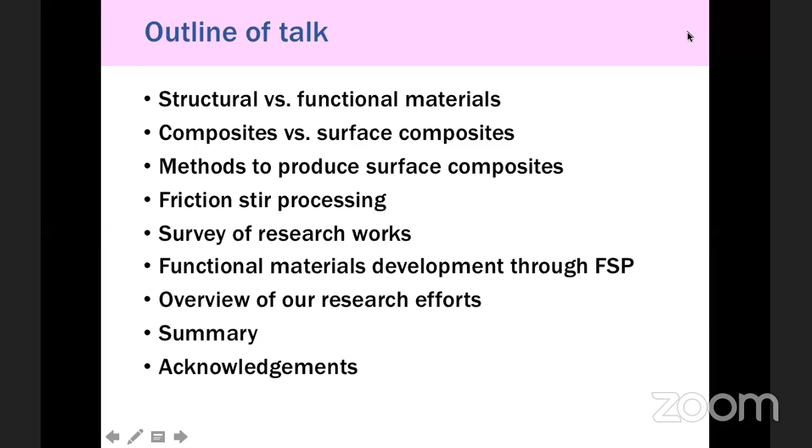First of all, I would like to thank the Department of Mechanical Engineering, Christian College of Engineering and Technology, Bhilai, Chhattisgarh, for providing me an opportunity to talk on this topic, friction stir processing, a tool for developing functional materials. So this is my topic.

The outline of my talk is as follows. First, let me differentiate structural materials from functional materials, and composites versus surface composites, and what methods are available to prepare surface composites. Then how friction stir processing can effectively be used to prepare surface composites, and what efforts have been made so far to produce surface composites through friction stir processing. Then, is there any effort to produce functional materials through FSP. Finally, we have made some attempts to prepare functional materials through friction stir processing, so I will give an overview of our own efforts, and finally summarize.

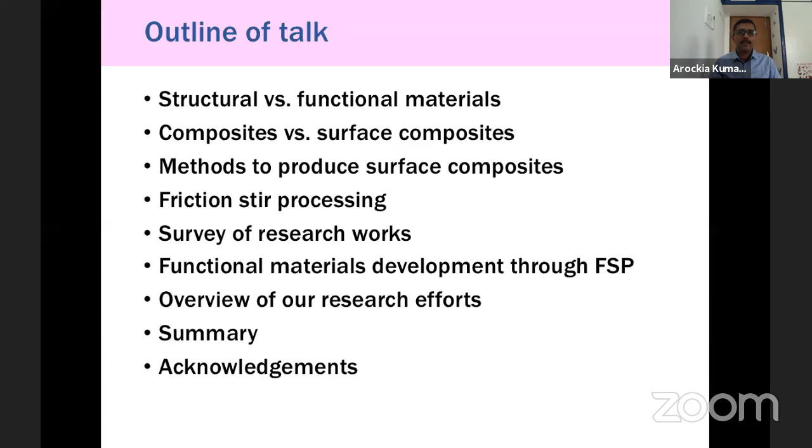Let me differentiate structural material from functional material. Structural materials are materials that are used primarily for their mechanical properties or load bearing applications. They are expected to endure a certain amount of load during their operation. Building materials, bridge materials, these all come under structural materials. Typical examples are steels, aluminum, magnesium. These materials are more like structural materials.

Functional materials are preferred for their specific properties. Apart from enduring load, they also exhibit some kind of special electronic, magnetic, optical or chemical properties. For example, nickel titanium alloy, apart from bearing load, also exhibits a unique property called shape memory, through which it is able to recover certain amount of deformation by simple heating or unloading.

There are some materials which I have shown in my slide on the right hand side, the windows. The windows are made up of a functional material. By applying a charge, they orient the molecules in certain directions so that it will permit the light. If I apply a different charge, these molecules align such that they don't allow any light. Apart from protecting your cabin from outside atmosphere, acting as a structural material, it also exhibits a special kind of optical property through which I am able to achieve certain function, whether I can allow light or prevent light entering into the cabin.

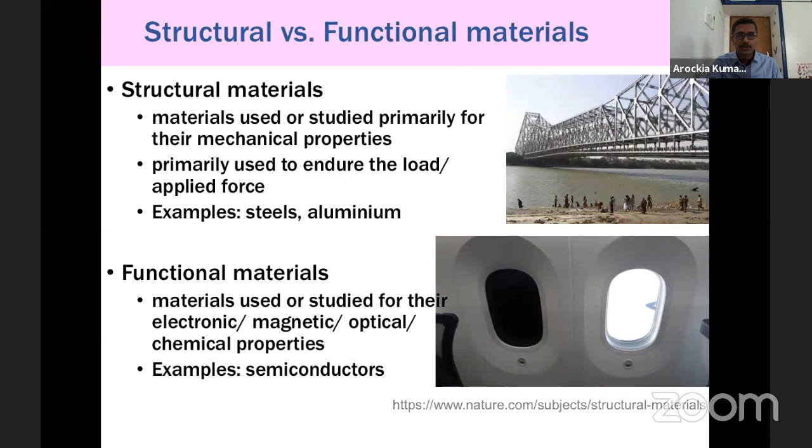Composites - being mechanical engineers, you might have heard a lot about composite materials. The development of composite materials starts with the development of structures for aerospace applications, where aerospace structures require low density, strong, stiff, impact, abrasion and corrosion resistant materials. We want all the best properties in the same material, but in nature we don't see all the best properties in a single material. So what we do is combine more than two or three materials in order to take their individual components' advantage. That's where composites come into picture.

Generally, composites are multi-phase materials, because when you want the system to exhibit several kinds of properties, it is necessary to mix them. So they are functional multi-phase materials, and they are chemically different - for example, metal and ceramic, or polymer and ceramic. Their properties are determined by constituent materials. If you mix metal and polymer, the composite will exhibit the property of metal as well as polymer.

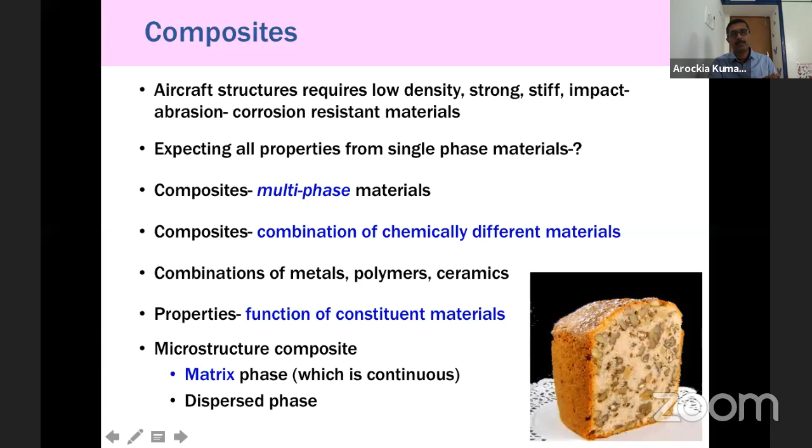What's the difference between composite and surface composite? This one you can say is a monolithic material of a single phase. When I mix something else, like yellow color particles mixed in a blue color metal, then it forms a composite - a mixture of two phases. The continuous one is called matrix, and the dispersed one is dispersoid.

In case of surface composite, we don't turn the whole material into a composite as in the first case - we turn only the surface into composite. That's why we call it a surface composite. Surface composites are more preferred because most of the time you want some specific properties to be exhibited only at the surface. For example, corrosion begins at the surface, so the whole material doesn't need to exhibit high corrosion resistance. If the surface exhibits very high corrosion resistance, then I can prevent corrosion at the surface itself, and the substrate material is completely preserved by the surface.

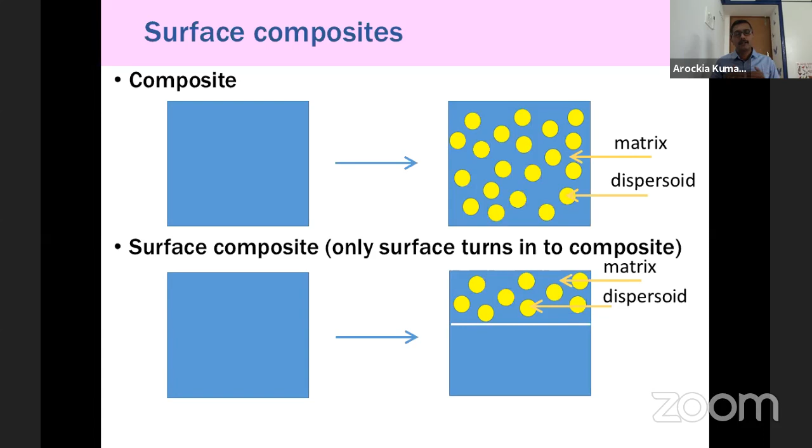So coming to your question, what are the different methods available to prepare surface composites? Hardfacing, either by arc welding, gas welding, powder spraying, or laser hard facing. Using these techniques, you can either modify the microstructure at the surface or coat something special on the surface. Similarly, for surface coating, several methods are used: thermal spraying, chemical vapor deposition, physical vapor deposition. These are the methods used to change the surface microstructure or deposit something new on the surface in order to enhance the desired properties of the surface.

Let it be corrosion resistance, meaning the interested properties may be improving the corrosion resistance, improving the wear resistance, or achieving some kind of functional properties - for example, how the surface has to scatter light. So the functional property may differ depending on the requirement.

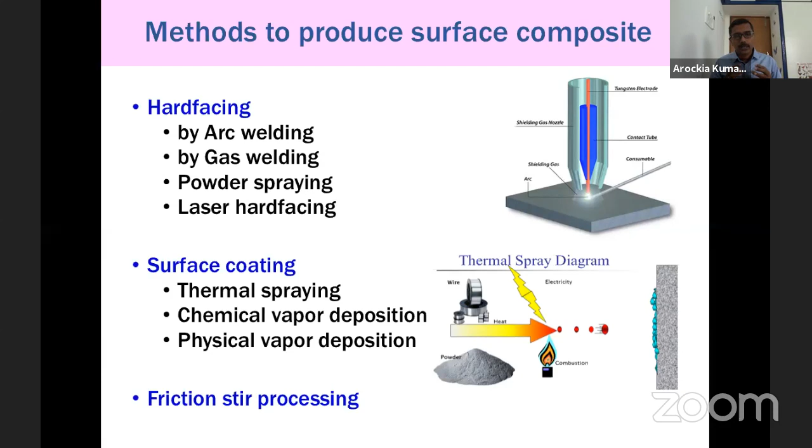So in this category, the recent technique is friction stir processing. In fact, friction stir processing is a modification of a process called friction stir welding. Being mechanical engineers, most of you might have heard of this technique.

Using this technique, it is possible to join plates even in the solid state. Otherwise, in conventional welding, we generally melt the parent material, and at the liquid state, both metals mix together, and by solidifying them, the joint is established. But in this case, what we are trying to do is, using a metallic tool, we try to stir, as shown in the slide on the right. We are just mechanically stirring the surface so that there is a mixture of material, and thereby the joint is established.

So this is completely in the solid state. That means when metal melts and then solidifies, there may be shrinkage, and because of this liquid-to-solid solidification process, it may induce some kind of defects - and that I can avoid. It also involves very high temperature, naturally causing oxidation or some chemical reaction, and it enables diffusion of elements, leading to compositional changes. All these things can, to an extent, be prevented by employing friction stir processing.

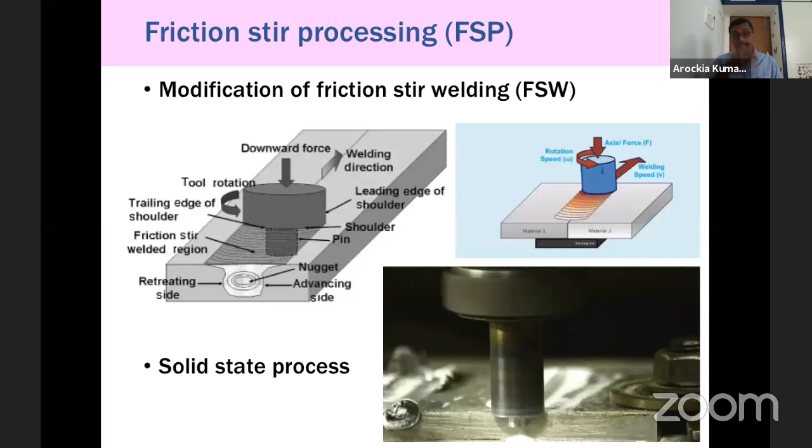Before getting into how friction stir processing is effective to produce surface composites, let me go through this topic: as an engineer, what do I look for in a single phase microstructure? If you take a simple pure aluminum or pure copper, that is a single phase material - what do I look for there? I simply look for the grain size. By changing the grain size, you will be able to determine the mechanical property.

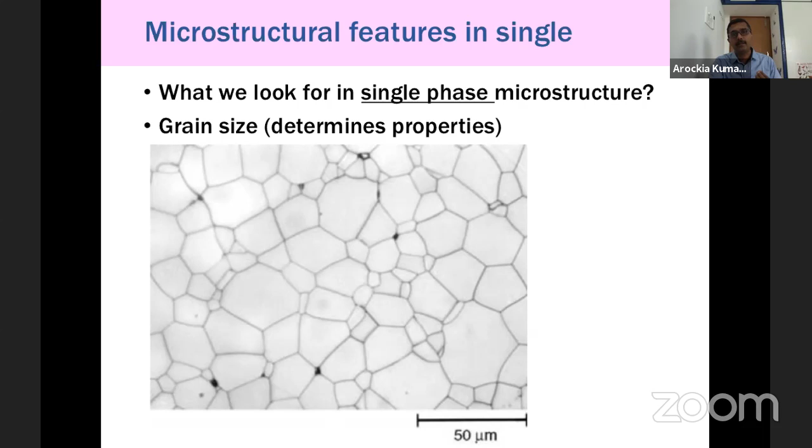Finer the grain, better the strength at low temperature, close to room temperature. Coarser the grain, better the mechanical properties at elevated temperatures. So the only choice you have in a single phase material is to play with the grain size in order to get desired mechanical properties. When it comes to composites, you get more choices, whereas in single phase material, only the grain size can be changed to vary the properties.

Whereas when it comes to metal matrix composites, or let's say a ceramic matrix composite, as I told you earlier, a composite has at least two features in its microstructure. One is matrix, the other is dispersoid. The matrix can be single phase or multi-phase, made up of single phase material or multi-phase material.

And then grain size - by playing with the grain size, you will be able to modify the property. When it comes to reinforcement, their shape, their size, and then interparticle distance between the particles, and then how these particles are distributed.

And what about the contiguity? Contiguity in the sense, sometimes if you put more amount of particles into the matrix, what happens? So these particles will touch each other.

Mechanical engineers, you might have heard about ceramic matrix composites. In order to process high speed steel or very hard materials, we use cermets. Cermet is nothing but ceramic metal composite, where in a cobalt metal matrix, very hard tungsten carbide particles are embedded. The fraction of these particles used to be around 90%. So when you put 90% particles, there is a good chance that one tungsten carbide particle touches the other tungsten carbide particles.

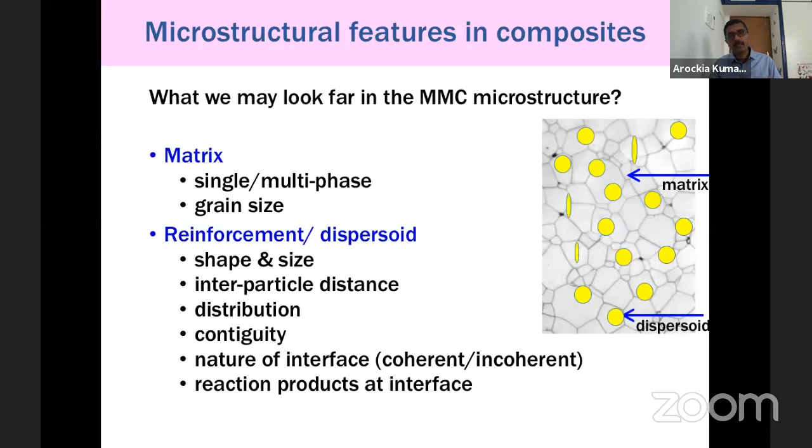So when it comes to metal matrix composite, you have a lot of factors or choices with you to play with the mechanical property. So if somebody is trying to prepare a composite using friction stir processing, one should understand how all these factors are being influenced by friction stir processing.

So let me take - what I have listed in this slide are the features one will see in a metal matrix composite. This is what you have seen in my earlier slide, and whatever I have written in red color shows how friction stir processing influences these features. When it comes to matrix, of course the matrix may have a definite grain size.

After FSP, the grain size reduces. And when it comes to reinforcement, you may have a very coarse precipitate or coarse reinforcement before FSP, but these precipitates are refined or broken down by FSP. And interparticle distance is altered after FSP.

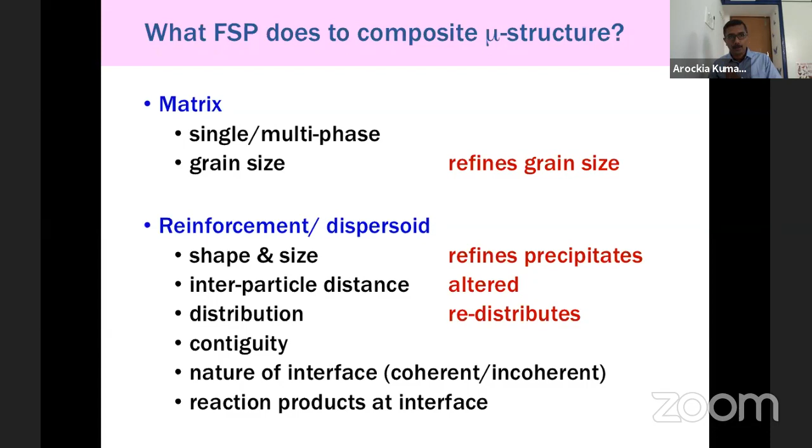And then how it's distributed - previously it may be inhomogeneously distributed, but after doing FSP you may get a very uniform distribution, or vice versa. Coming to contiguity, nature of interface, and reaction products - all these features can be altered after FSP. So all these things will definitely influence the properties, which we have to keep in mind.

So here, in my earlier slide I gave this in terms of words, but here I am showing you in terms of microstructures. What FSP does - I'm showing EBSD maps of pure aluminum before and after FSP. Before FSP, you hardly see maybe 3 to 4 grains, but after FSP you are seeing several grains. So in this case, the grain size is reduced after doing FSP.

And by means of FSP, you will be able to incorporate some particles, meaning you will be able to produce a composite. So we have taken pure copper and distributed tungsten particles into it, producing a copper tungsten composite.

And here we have refined the microstructure of a zinc magnesium alloy. What you are seeing on the right hand side top microstructure is a zinc magnesium alloy - it's a two-phase alloy, a mixture of zinc plus zinc magnesium intermetallic phases.

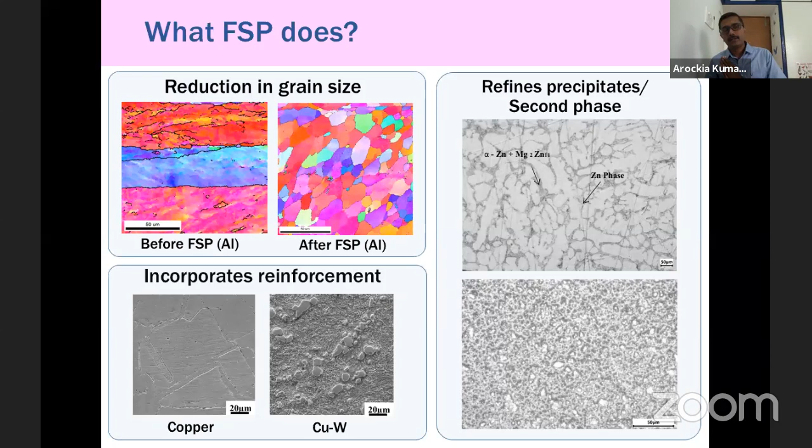After doing FSP, you are unable to distinguish these phases. Here, I am clearly seeing the presence of two phases - one is dark color and the other is brighter. But here, it is completely mixed. So like this, you will be able to drastically alter the microstructure, and thus in turn have a significant influence on mechanical properties.

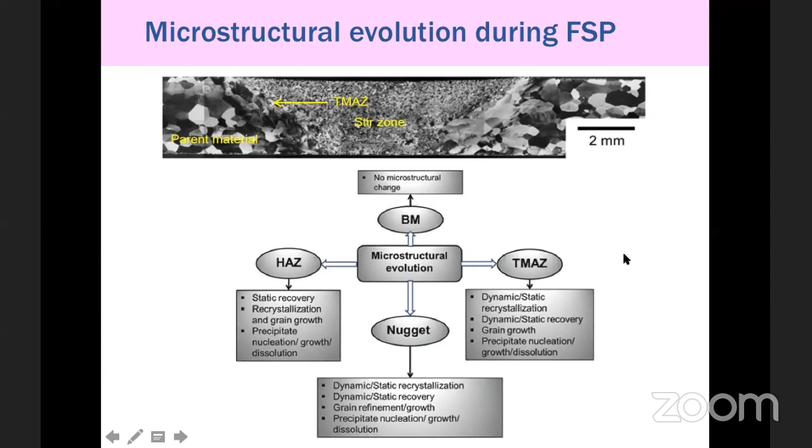Dr. Rao, is it going well? Yes, sir, yes sir, it is fine, sir.

Now, how this microstructure evolves during FSP. What I'm showing at the top is a pure material, pure aluminium, and then after conducting FSP, how its microstructure alters. You will see some U-shape in this aluminium plate.

So what is this? This zone is where the microstructure is completely altered after FSP. Before FSP, the grains are very large, you can clearly see this. But after doing FSP, at this magnification, we are unable to distinguish the grains.

Like with any other welding technique, we have parent metal and weld zone, and in between we have the heat affected zone. That is a typical microstructure of any welded component. Here also we have a thermomechanically affected zone, and in some cases a heat affected zone. So we have four kinds of zones: parent material, heat affected zone, thermomechanically affected zone, and stir zone - four kinds of microstructure after FSP.

So what causes this microstructural evolution in FSP? As you might have seen in my earlier slide, what we are trying to do is stir the material with a hard tool rotating at a certain speed, which also travels on a straight path. Because of this stirring, we are imparting a certain amount of strain into the material.

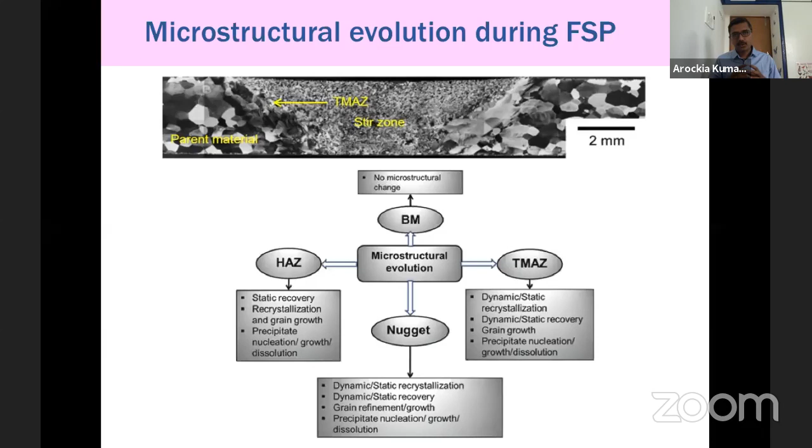When it comes to heat, what parameters control this? There are three kinds of process parameters: machine variables, tool design variables, and material properties. Machine variables include the speed at which the tool rotates, the speed at which the tool travels along the material, tool tilt angle, and tool plunge depth - these are some typical machine variables.

Among these, if you conduct a literature survey, many studies suggest that tool rotational speed and tool travel speed are the two major parameters used to control the microstructure. When it comes to tool design variables, there is tool shoulder diameter and tool probe diameter.

So it is simply, like what I am showing on the other side, there are different kinds of tools. Either you can use a simple cylindrical tool, a kind of pen-like tool, or you can use some threaded pin or stepped spiral pin. So there's a tool profile to consider.

You can use different tool profiles, and then different diameter cylindrical pins. The same thing applies for the probe also, it can have a different diameter, a different profile, and height, so it can have a different height, varying length. And then material properties, mechanical and thermal properties.

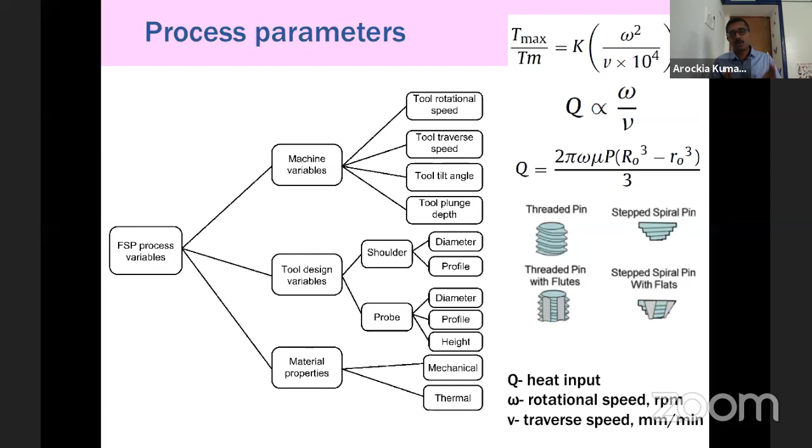If I increase the tool travel speed, then the heat input into the material decreases. So tool rotational speed and tool travel speed are very important in deciding how much heat is transferred during this process. This heat plays a major role in microstructural alteration, as I described earlier. So selection of these process parameters is essential to get a very healthy processed region.

If you keep on increasing the tool travel speed, there is generation of a wormhole, meaning throughout the section of the processed region there will be a hole inside. Why is this so? Because when you travel at very high speed, the heat may not be enough to completely plasticize the stirred volume. In that case, a hole develops throughout the path of the tool.

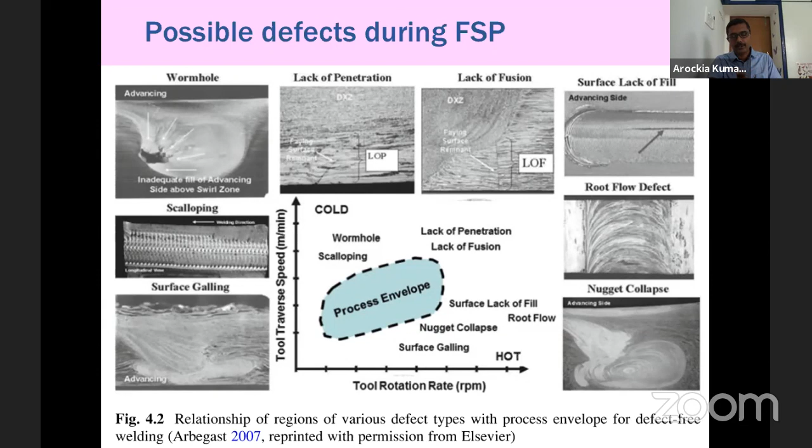That's called a wormhole. Similarly, there are several kinds of defects caused by certain process parameters. The key point is one has to optimize the key process parameters like travel speed and rotational speed in order to produce very healthy billets, healthy process zones. So the next topic is how to prepare surface composites via FSP.

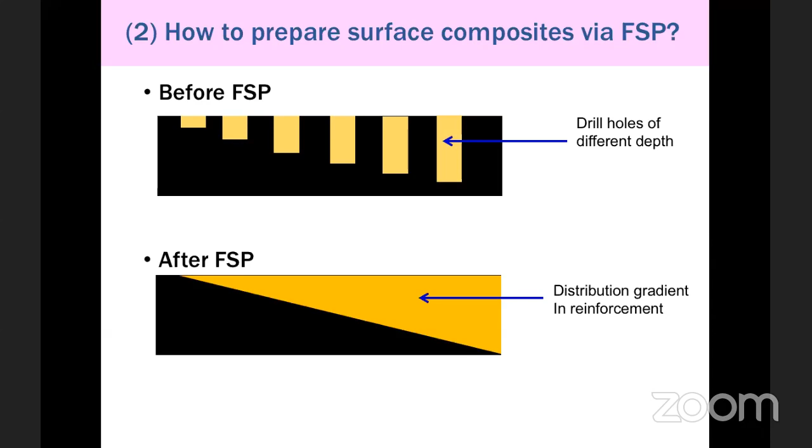Yeah, fine. So the second method is what we can do: we can drill holes of different depth.

These holes are filled with different kinds of required reinforcement, and then you do FSP. By this you will be able to vary the reinforcement content from one end to another end. Thereby you are not only producing composite, but also producing functionally gradient composite, meaning one end will have very high amount of reinforcement and the other end very low amount of reinforcement.

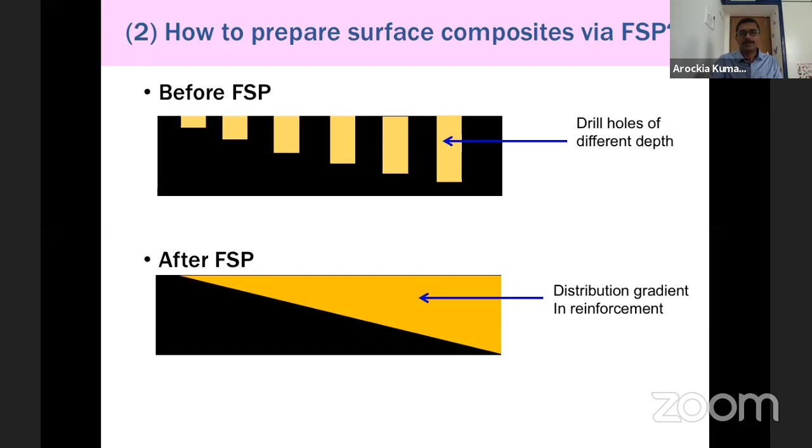Thereby you will be able to produce a surface composite with some variation in the properties. You can drill the same depth but a different diameter, and thereby you will be able to incorporate different amounts of reinforcement from one end to the other end. So you will be able to generate a surface composite, and at the same time you will be able to generate a functionally gradient microstructure.

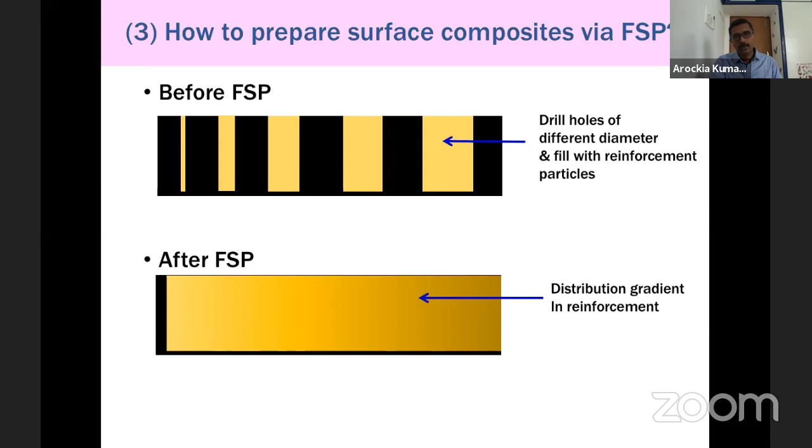Of course, if you go through the literature you will find some more methods of developing surface composites through friction stir processing. So what I'm showing here is what are all the surface composites developed through FSP.

If you go through this slide carefully, you will understand that most of the time people have chosen aluminium as a matrix. It can be pure aluminium like 1100, or an aluminium based alloy like 2024, 5083, or 7050. I have limited to certain alloys here, but in the literature you will find all kinds of aluminium alloys, right from 1 series to 8 series, chosen as a matrix material. When it comes to reinforcement, silicon carbide, tungsten carbide, boron nitride, boron carbide - people have used several kinds of reinforcement particles to reinforce aluminium matrices.

Once they construct a composite using this technique, what kind of properties have they studied? Mostly they have characterized mechanical properties - tensile strength, hardness, and wear resistance.

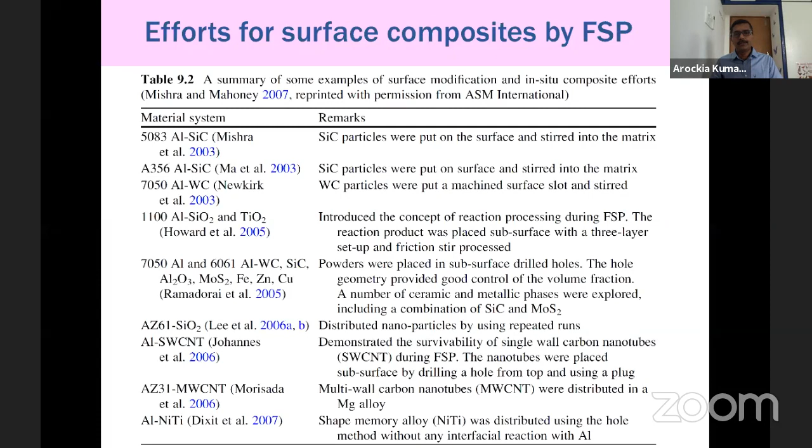Very few people have developed functional materials through FSP - that is, by incorporating a reinforcement with a specific set of magnetic property, electrical conductivity, or thermal conductivity. In addition to changing the mechanical property, you are also able to change some kind of functional property, which can be magnetic, electrical, thermal, or damping - everything.

Let me give you an example. Some researchers have taken aluminium alloy, for example 2024 or 2014 aluminium alloy, and mixed in nickel titanium particles. This nickel titanium is a very popular shape memory alloy. By adding this, nickel titanium shape memory alloy has a very good damping property because of its phase transformation behavior.

So by incorporating nickel titanium into aluminum, you are changing the mechanical property, because nickel titanium's mechanical properties are better than aluminum. At the same time, nickel titanium enhances the damping property of aluminum or aluminum alloy. So thereby both properties are changed.

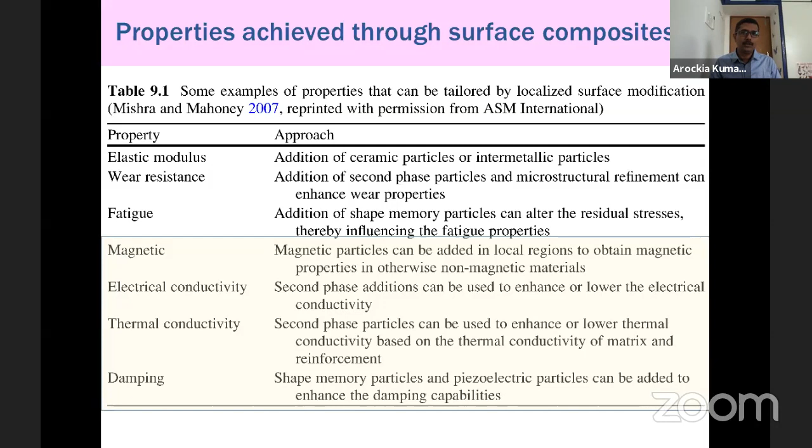So far I was trying to say how FSP can be used to prepare surface composites, and how this technique can be exploited to produce functional materials. If you go through the literature, you have a reasonable amount of literature available on effectively using FSP for functional material development. In our laboratory, we have also tried to develop functional properties of some materials, and I am going to share two such examples hereafter.

So, first, development of high strength, high conductivity - that's what HSHC stands for - high strength, high conductivity copper alloys. If you take pure copper, it has 100% IACS. That means we assume pure copper's, annealed copper's, electrical conductivity is 100%. That's what 100% IACS means - International Annealed Copper Standard.

So 100% IACS, pure copper has only 40 HRB hardness, and tensile strength is only around 210 megapascal. But in order to use pure copper in applications like electrodes or switches, which I have shown at the bottom of the slide,

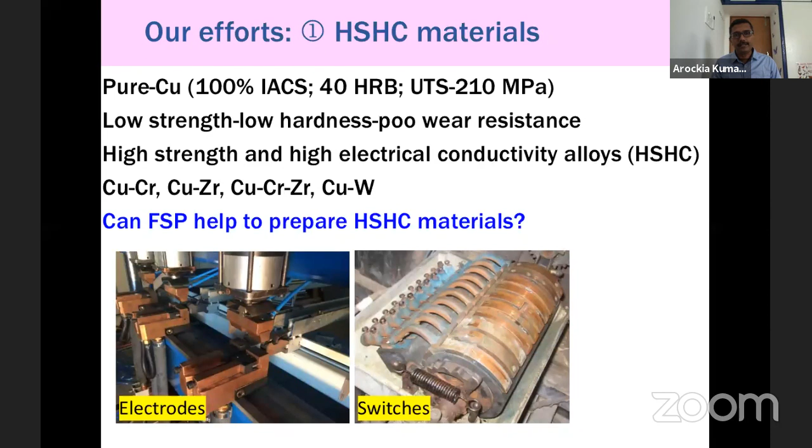That will reduce the electrical conductivity even down to 40% IACS. So what is the remedy now? Is it possible to develop a high strength, high conductivity material through FSP? That's what we have explored in our work.

So what we did, we have chosen pure copper, and applied FSP, processed it through FSP. We studied its mechanical property and electrical conductivity. And we have chosen some commercially available copper alloys, which I have listed here: copper chromium, copper zirconium, copper chromium zirconium.

All these alloys exhibit 70 to 80% IACS conductivity. So is it possible to improve the strength of these alloys without deteriorating its electrical conductivity? That is the objective. And then what we thought of preparing some composites using FSP.

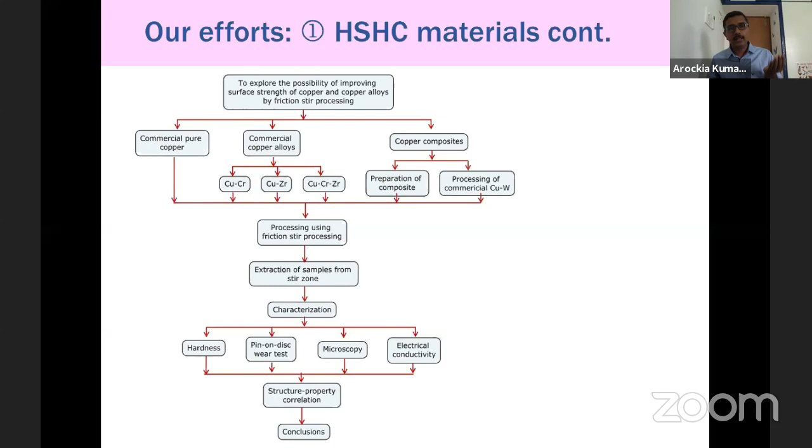So copper tungsten, copper graphene composite. We thought of developing this kind of composite through FSP, so that whether I am able to improve the strength at the same time without deteriorating the electrical conductivity. And that is the ultimate aim of the work.

So this is one good result. What we have got is copper graphene composite. In this case, after doing FSP, what you are seeing here is a very coarse microstructure, around 40 micron grain size before FSP.

But after doing FSP, the grain size is reduced to somewhere 1.5 to 2 microns, and it depends on the travel speed. So what we did, we varied the travel speed, we fixed the rotational speed, and thereby we studied how FSP affects the grain size.

At the same time, how effective it is distributing graphene. So in all these processes, through Raman spectroscopy, we confirmed that graphene is uniformly distributed in the stir zone, and the grain size reduced from like 40 micron to a minimum of 1.5 micron.

And the good thing we have got through this research is the decrease in electrical conductivity. I am sorry for the poor graph here. The electrical conductivity without, in the as-received state, is very close to 99% IACS. After incorporating graphene and refining the grain, the electrical conductivity is around 97.5. So that is around 1.3 to 1.5 IACS decreased. Decrease in electrical conductivity is very less.

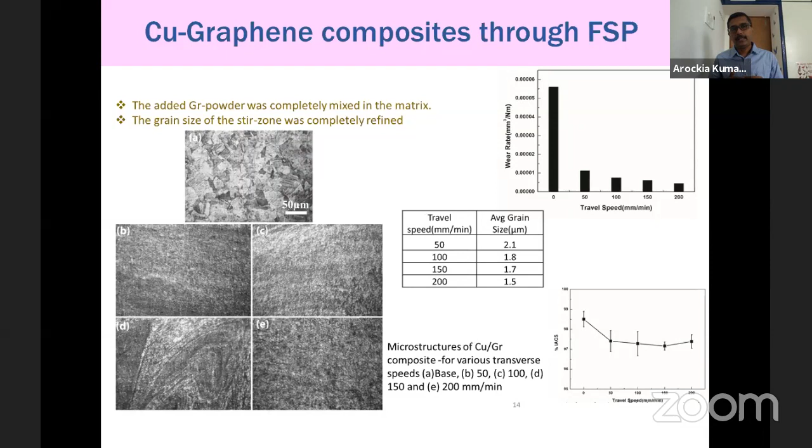But if you see the wear rate, it is drastically reduced after FSP. Hardness also increased. So the point is, through FSP, we improved the strength significantly. At the same time, there is an insignificant change in electrical conductivity. So to an extent, our objective is achieved by employing the FSP technique.

And what we did, copper tungsten composite is one of the successful copper composites available in the market. The problem with available composite in market is they have very poor electrical conductivity, because tungsten has very low electrical conductivity. So when you add tungsten into copper, then copper's conductivity also decreases.

So what we were trying to do is, instead of putting more amount of tungsten, we put less amount of tungsten and then improve the strength by FSP. So is it possible? Once again, the wear rate is significantly reduced, and at the same time, the conductivity is not decreased to that extent. The conductivity is decreased only around 1 to 1.5%.

That's it. So this is possible because, by FSP, we are introducing new surfaces. Nothing but we are refining the grain size, and thereby we are introducing lots of surfaces, and that really helps to improve the strength. You might have also heard about Hall-Petch strengthening. When you decrease the grain size, the strength of the material at room temperature improves a lot. This is because grain boundaries are effective in preventing the motion of dislocation. Thereby we are improving the strength.

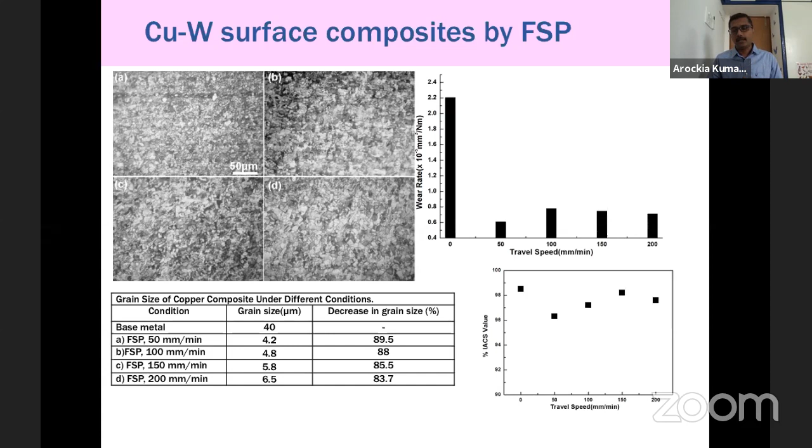So, is it possible? In the earlier effort, in addition to improving structural and mechanical properties, we were able to achieve certain functional properties. We have not deteriorated the electrical conductivity.

So far we are using FSP or FSW just to make joints or alter the microstructure and mechanical properties. What we have investigated here is whether it's possible to change the damping through FSP. Damping is one kind of functional property, influenced by the inherent damping of the material and by the microstructure. So by altering the microstructure, you will be able to change the damping. This microstructure can be engineered by FSP, and that's the motto of our research work - through FSP, is it possible to alter the microstructure, thereby the damping property?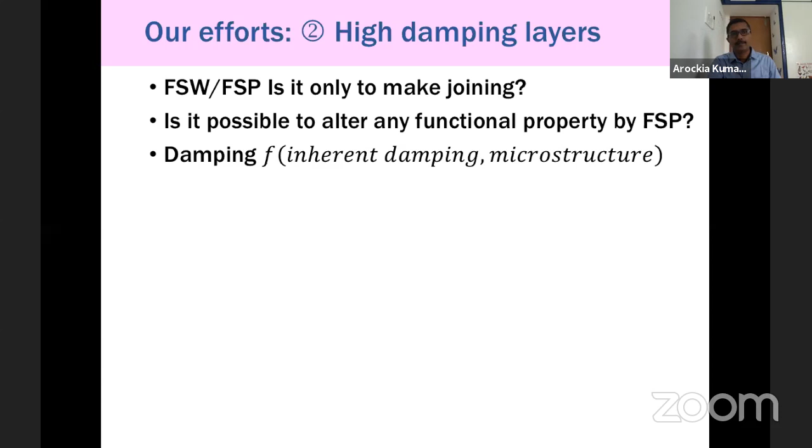What we have done is processed some metals like aluminum, copper, magnesium, and we also chose aluminum alloy 6061, and prepared some surface composites. Then we characterized this damping property using a dynamic mechanical analyzer, and a technique called impulse excitation technique or resonant frequency damping analyzer. Using these two techniques, we analyzed the damping property of our FSP materials.

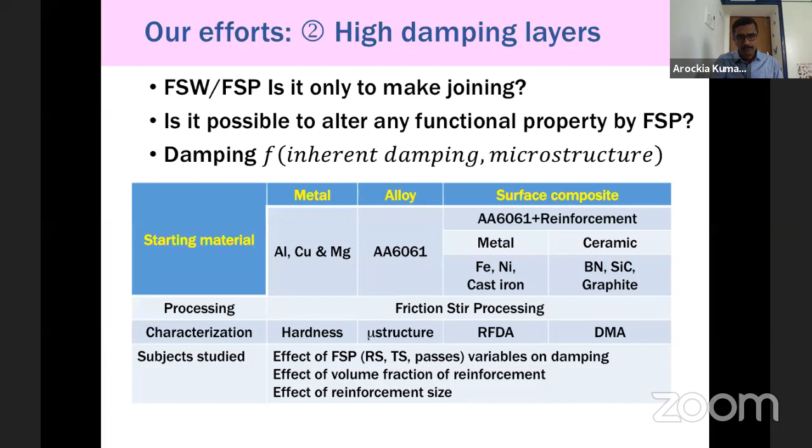In case of pure aluminium, we were able to decrease the grain size from 44 to 10 micron after FSP. In case of copper, 20 to 4 micron. In case of magnesium, it is 780 to 25.6 micron. So the grain size was very coarse in the as-received material, but it is greatly refined after FSP.

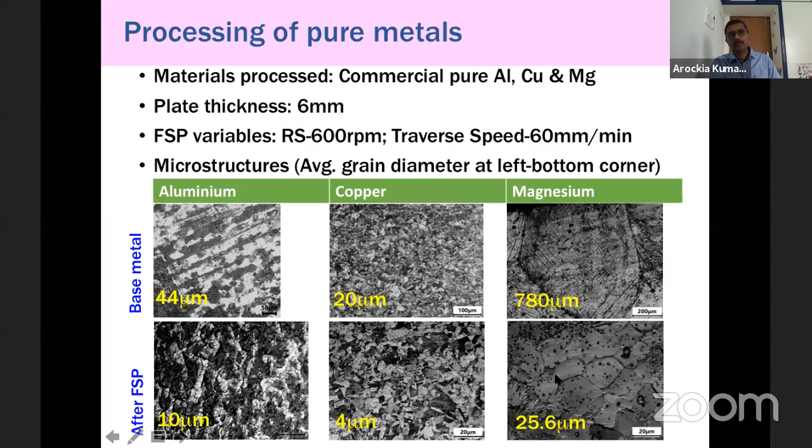And then how this influences the damping property of the material. These graphs show amplitude of vibration with respect to time, showing how effective the material damps the vibration. If you see pure aluminium in this graph, it takes very long time for the vibration to die. After FSP, it is somewhat reduced, but not that evident.

But if you see copper, it is clearly evident - before FSP, pure copper takes very long time to damp the vibration. But after FSP, the vibration dies very quickly. That means the damping property of pure copper is significantly enhanced just by doing one pass of FSP.

So the same thing I have shown here: pure aluminium damping property is increased 1.5 times, damping property of copper is doubled, whereas damping property of magnesium after FSP decreased - greatly decreased, in fact.

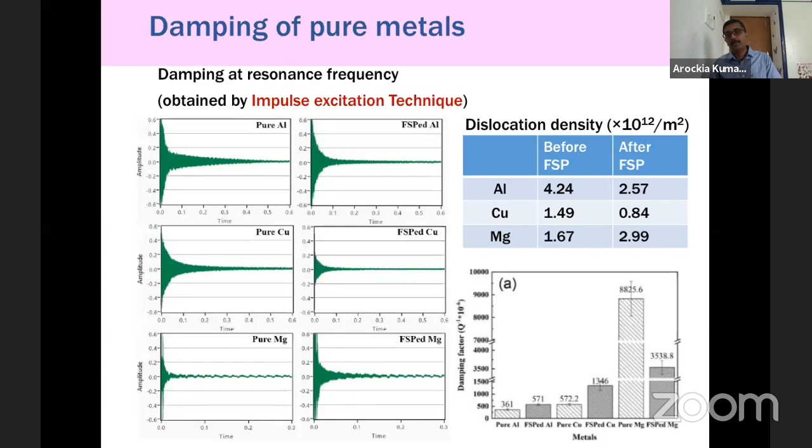This is because of how magnesium damps the vibration. The movement of dislocation has to be allowed in order for effective damping. But what happens in magnesium after FSP is that it produces a lot of dislocation tangles, and these tangles are not allowing dislocation movement during any external vibration, thereby reducing the damping property. Whereas in the other materials, it increases.

So whatever I have shown here is at room temperature, but the same thing is shown at high temperature also. The properties of pure copper and pure aluminium greatly enhance. Whatever you are seeing in red color in this plot is damping property as a function of temperature, how damping changes with respect to temperature.

The red color one is for the FSP material, and the black color curve is for the as-received material. So in all these cases, you can immediately conclude that at high temperature, FSP materials are good in damping the vibration. This is because of large fraction of grain boundaries. Generally, grain boundaries are amorphous in nature, so under external loading conditions, these boundaries will move and thereby absorb the external vibration.

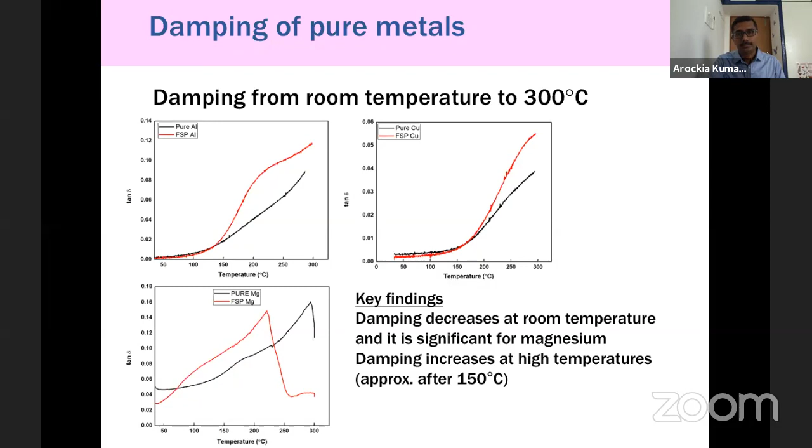So we have also produced 6061 graphite composite, and here I'm showing how the damping property increases after doing FSP with respect to frequency. Y-axis in both plots is damping. In the first plot, the x-axis is frequency, that is, when I change the loading frequency, what happens to damping of the material before and after FSP. And when I change the temperature, what happens to the damping before and after FSP. Here, immediately after FSP, there is a significant increase in damping.

Not only by FSP, but by addition of graphite also, the damping improved a lot. And in fact, in all these cases, by incorporating the graphite as well as FSP, we were able to increase the damping double or triple. So that's the point I would like to convey.

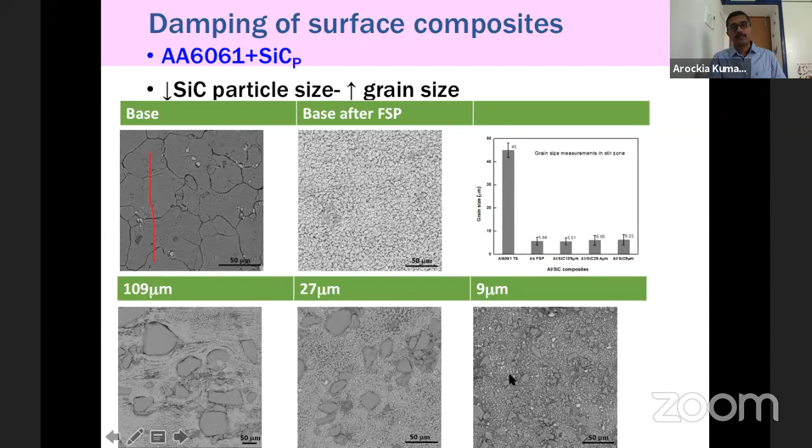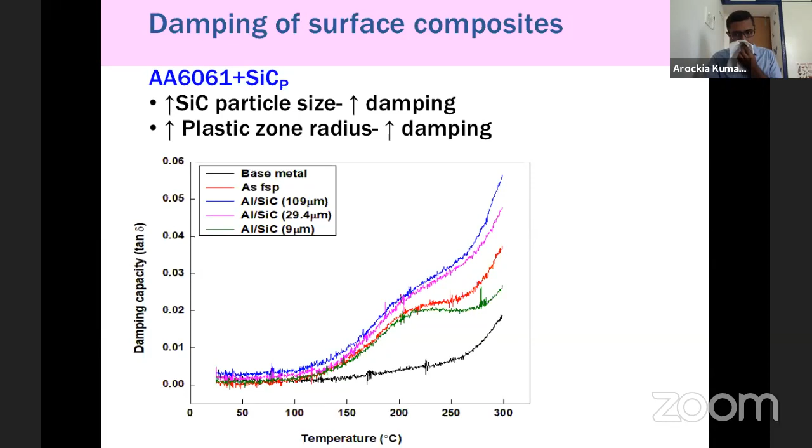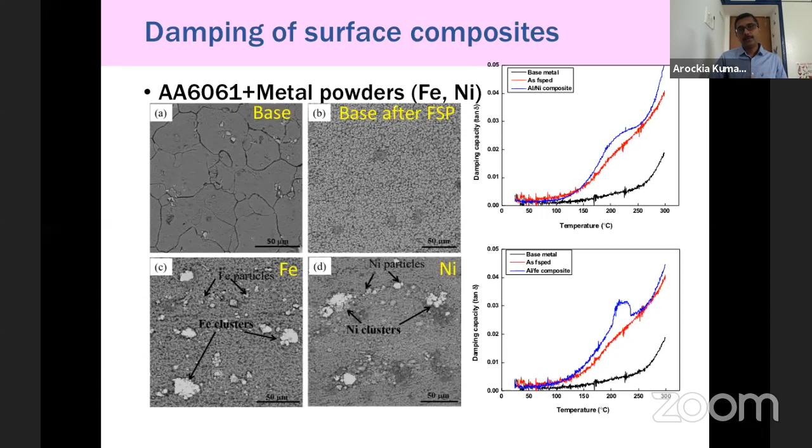In this plot also, after incorporating particularly this is for as-received material, and then this one is for FSP. But if you see the bottom two plots, when you incorporate iron or nickel, the damping is greatly improved, and that's what we are seeing here through these plots.

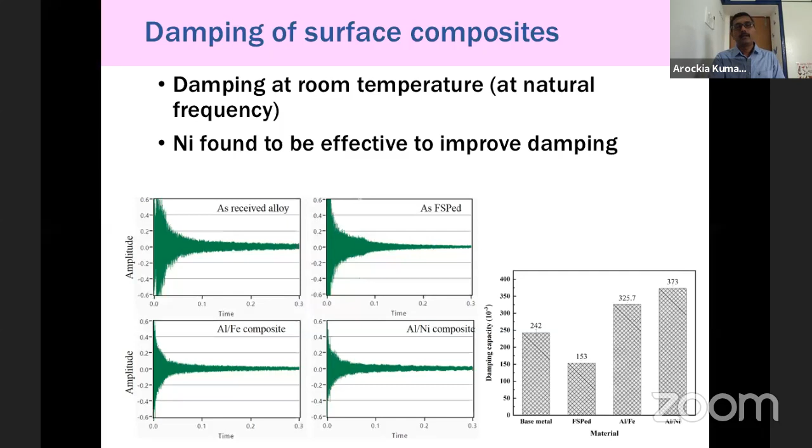So the summary is, the damping property is greatly enhanced after FSP, and also by incorporating silicon carbide particle, iron, boron nitride, or nickel. So we have effectively used FSP to alter the damping properties of the material, in addition to improving the mechanical property, and that's the key message here.

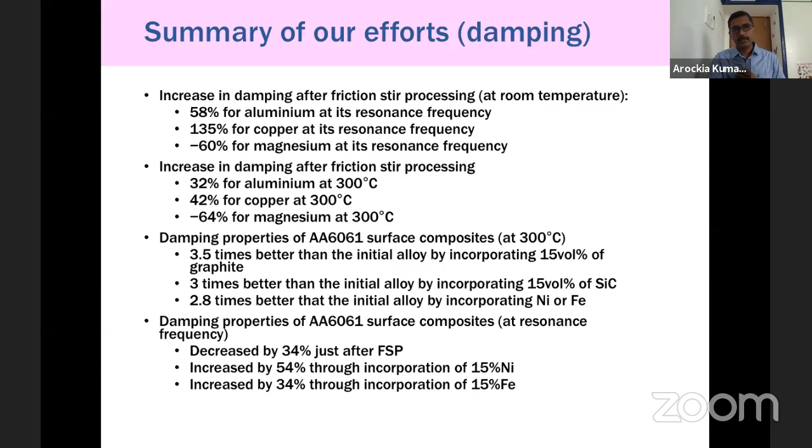Several efforts have focused on enhancing the strength, hardness, and wear resistance of aluminum or magnesium alloys by FSP. But what I have shown now in my talk is that FSP can be effectively used to develop functional properties. I have also shared our own experience in improving the functional property, that is, preserving the electrical conductivity or enhancing the damping behavior of aluminum or copper alloys.